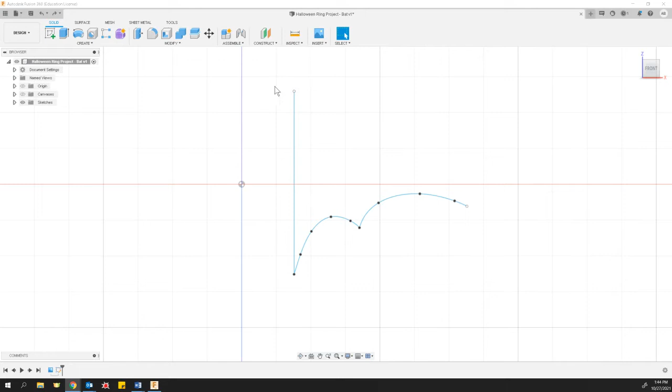I'm going to do just that right now. I'll insert a canvas, and where I'm going to look for this picture is insert from my computer. So now I can simply find the picture I want to insert, say open, and I've put my image in there.

Now, it'll let you use the corner to scale up or scale down, or you can move that image around. I've already set it to where I want it, which is why I've got these lines partially in place already. I'm just going to continue using the Spline tool. I need to go into a sketch, so you would go to create new sketch.

As you can see, I've already started a sketch, so I'm going to edit that same sketch I was already working on. I'm going to use the Spline tool to click on the beginning of a curve, click on points along the way, and double click when finished with that curve. So I put those points in here like this, starting on the curve, and I'm just going to quickly go through here and do that.

Okay, so now I've finished using the splines and lines to sketch in. You'll notice I only did half of the bat, and then at the end here I put a vertical line in to represent a line of symmetry, straight down the middle of the bat, like so.

Now what's cool about this is I can use this mirror tool to take everything I've done on one side and reflect it over the mirror line. So when I click mirror tool, it gives me a dialog box and asks two things: what objects would you like to mirror, and what is the mirror line?

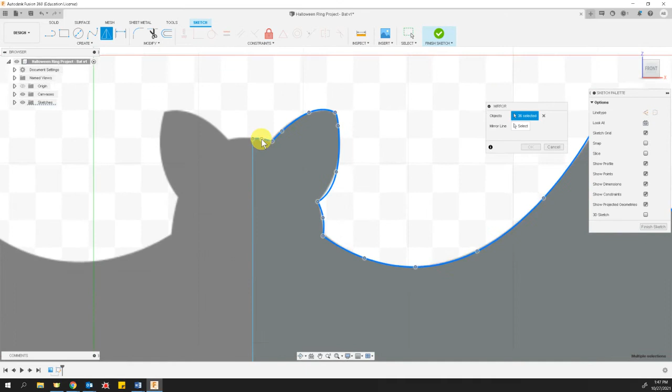If you accidentally click and select your mirror line as something to be mirrored, it's not the end of the world. You could also click on that mirror line to deselect it, because we don't want to duplicate that line. So now we select the mirror line picker, and it asks what is your mirror line, and it's this line right here.

So now you can see that it mirrors my image, my lines over. It's not perfect, but guess what, it's going to look pretty good. When we click OK, and click on the image...

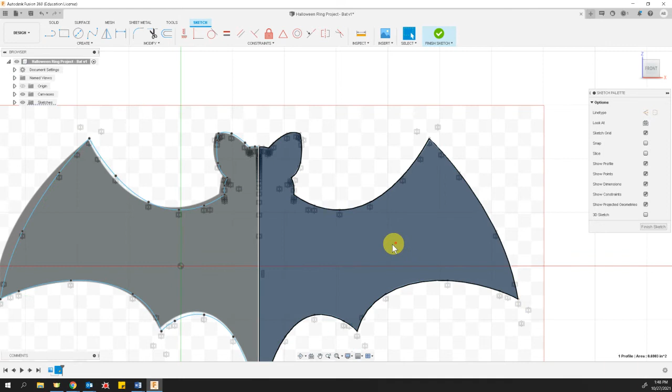Now I can erase the center line out of there, and I can actually turn off the canvas since that little discrepancy is going to get on my nerves. I can go over here and make the canvas invisible now, so now you can see my drawing of a bat is really pretty easy.

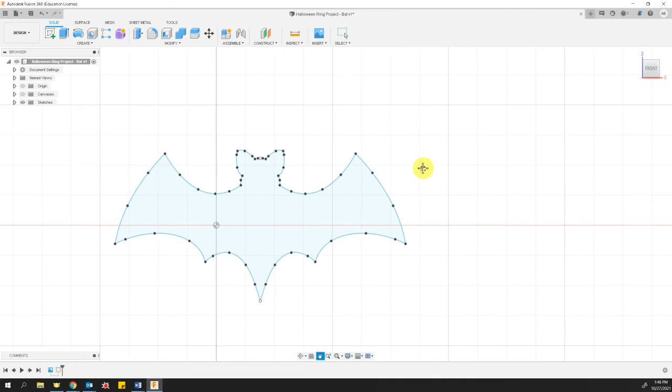So I can now finish the sketch. It's got all those points showing up as part of the sketch, but that's not a big deal. At this point, I want to go ahead and extrude my bat shape. It is a closed profile, a closed loop, so that's good.

And I'm going to extrude it out just a little bit here. You can put features on there and extrude the features, such as a face if you'd like.

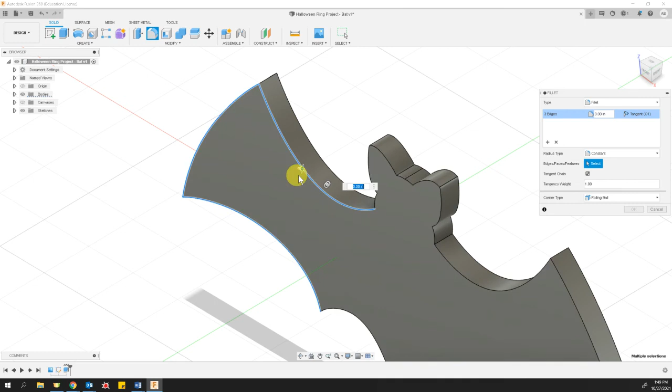At this point, you could go through and add a fillet or a chamfer if you'd like around all the edges. All you have to do is click on the edges you want to fillet, and a fillet, remember, is a round over. So when you're done selecting all your edges, you use the little arrow to round over the edge.

I'll just do a couple more here. You know what, I could have done it a quicker way by clicking on the front face of the bat, I believe, but that's okay.

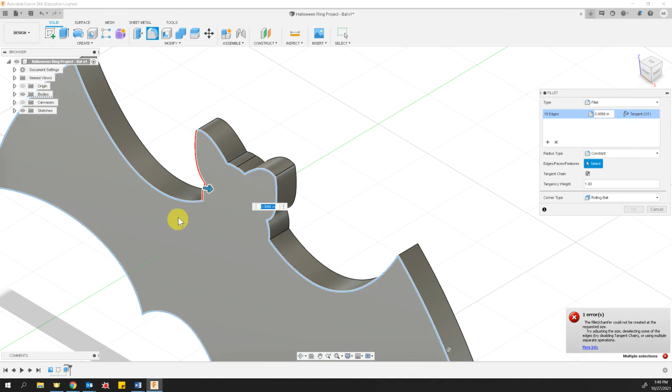I'm almost done with this. Now you use the arrow to push in a little bit, and it rounds over and makes a rounded corner. It's giving me some errors here saying that's too big of a round, so I'll just escape out. There we go, yeah, it worked for me that time for a second.